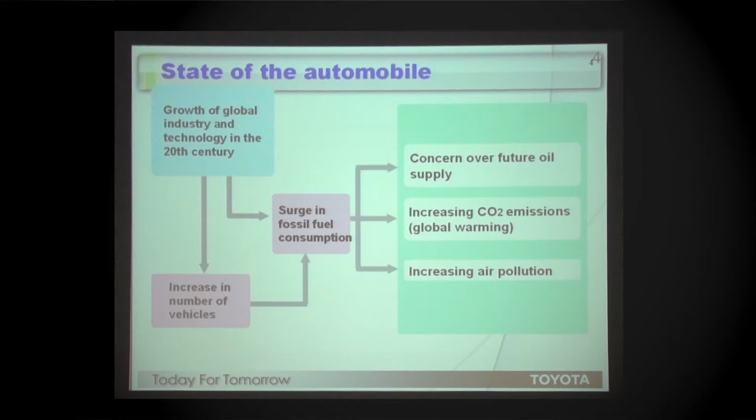But the car industry is still far behind. So I'm talking about the car industry a little bit. The state of the automobile relates to energy issues, because when the oil price goes up, what happens? People are forced to drive a car. If you are in Tokyo, maybe you can use a subway or public transport.

I'm living near Nagoya, only 10 to 20 kilometers away from the big city. Our family had 5 cars, not because I'm working for the car industry, but because our society outside the city is based on cars. When my mother wants to buy something, she has to go to the supermarket 5 or 10 kilometers away — no bus, no train. So the car is the only way to survive for us.

So when the oil price goes up, my salary goes to oil, and I have no money left for my hobbies. So that is the reality everywhere — in the United States, Japan. Japan and the United States are a bit lucky because our income or GDP is much bigger than just buying oil, but there are many countries that spend huge portions of their whole GDP to purchase oil.

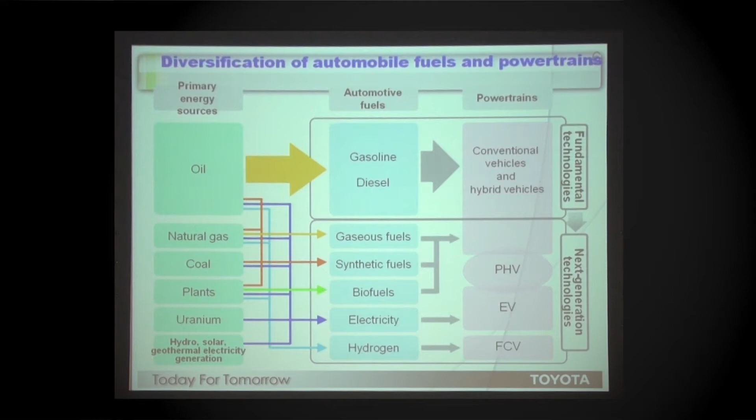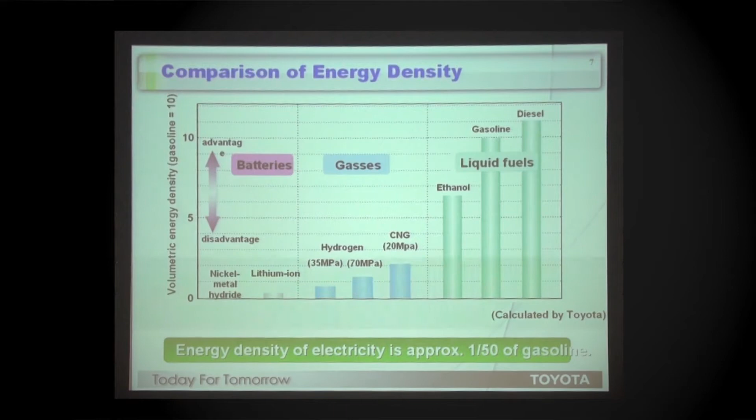But there's a big issue: the transportation of hydrogen is a big problem, and storing the energy on the car is also a big problem. Compared with gasoline or liquid fuel, hydrogen or battery has very small capacity to store. So this is a big problem.

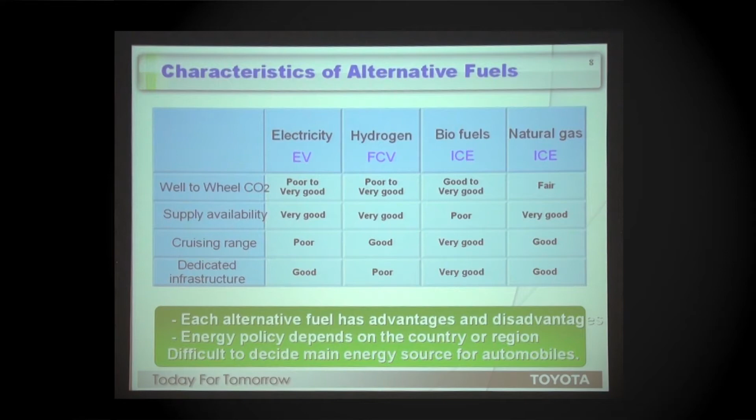This is a comparison of alternative fuels: EV, FCV, ICE. There's no perfect fuel. As Ambassador Roos said, we have no silver bullet. We need a portfolio to use the best option in the best place at the best timing.

And this is the hybrid. I was luckily involved in the Prius development 15 years ago. Actually, next Monday is the Prius's 15th birthday. So I remember the very hard days before that birthday.

Interestingly, 15 years ago I never expected further progress for the Prius. The Prius was a technical showcase — a very good combination of technology. But the reason I didn't expect more was that when we developed the Prius, oil price was only $12 a barrel.

Later, I proposed to our executives that the Prius, or hybrid technology, could flourish and become popularized when the oil price went above $40 per barrel. But my big boss said, don't joke — maybe twice that price is possible, even three times, but $40 per barrel is more than a joke, he said. But only 7 years later, the oil price was $145.

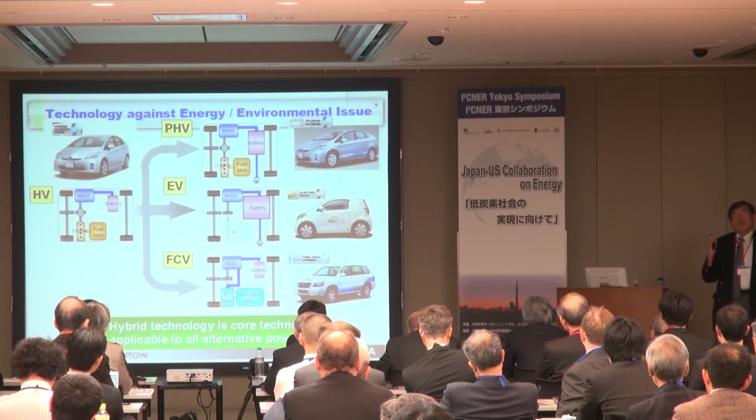I think those pressures develop new technology. When you put a bigger battery for the plug-in and replace the engine with the battery, that's an electric vehicle, or actually remove the engine.

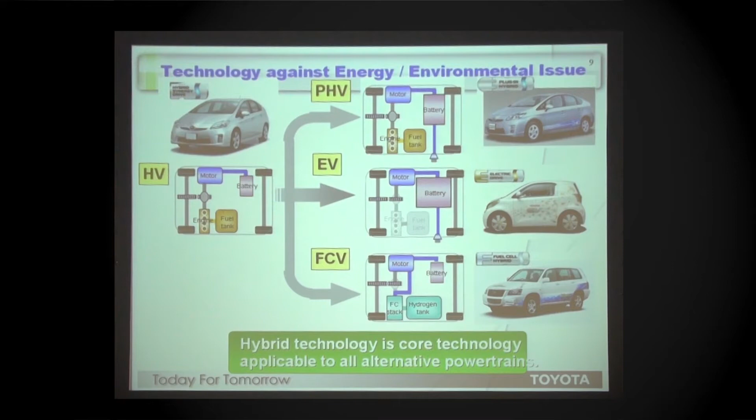But only the fuel cell has a very big coverage compared to the electric vehicle, plug-in, or internal combustion engines.

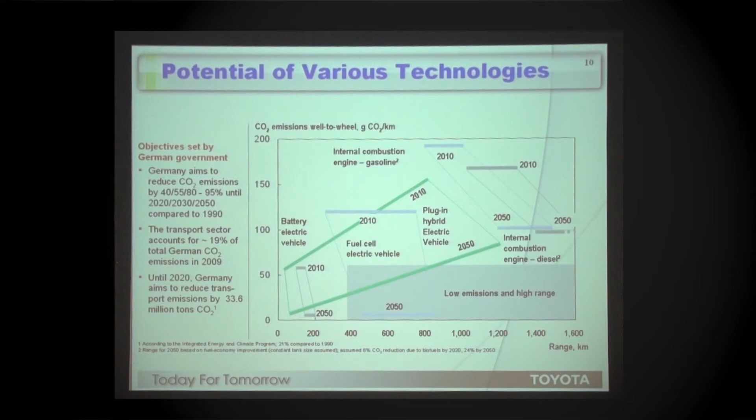I have been working with engine engineers. As long as oil is available, oil is a very good fuel, but it's very precious, so we need to keep it as a precious material. We need oil not just to burn, but to make your clothes or plastics. I think this is very important.

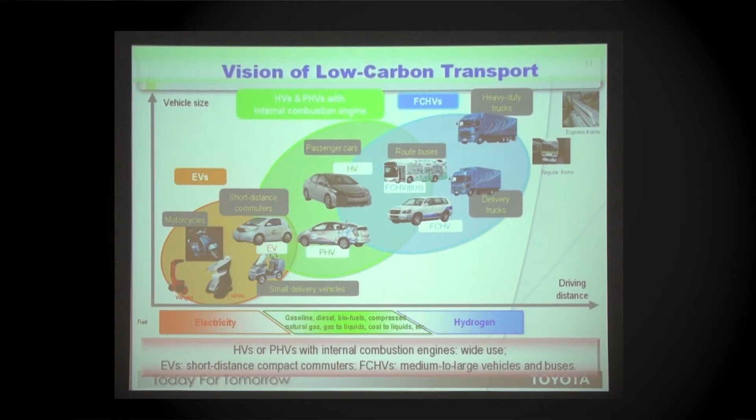So this is our portfolio for low carbon transport. As long as oil is available, plug-in and hybrid is very good. For small commuters, the electric vehicle, and middle to large vehicle with a fuel cell, and the larger, maybe the train or other alternatives. This is a comparison of efficiency.

From natural gas, this is the total efficiency - the efficiency to produce electricity or hydrogen. Then this is the efficiency of the vehicle itself. If you multiply the fuel efficiency and vehicle efficiency, this is well-to-wheel, and this is in direct connection to the carbon dioxide emission.

So electric vehicle is very good in vehicle efficiency, but when you produce electricity, you emit a lot of carbon dioxide, basically. Especially in Japan now, we do not have nuclear power at this moment, so probably efficiency is better, but you need to produce electricity, emitting more carbon dioxide.

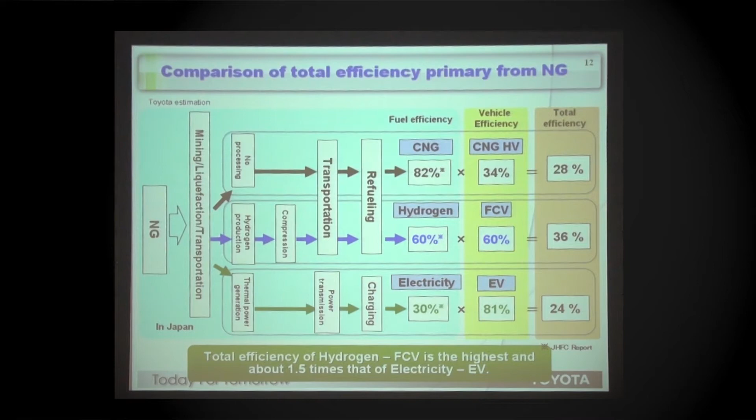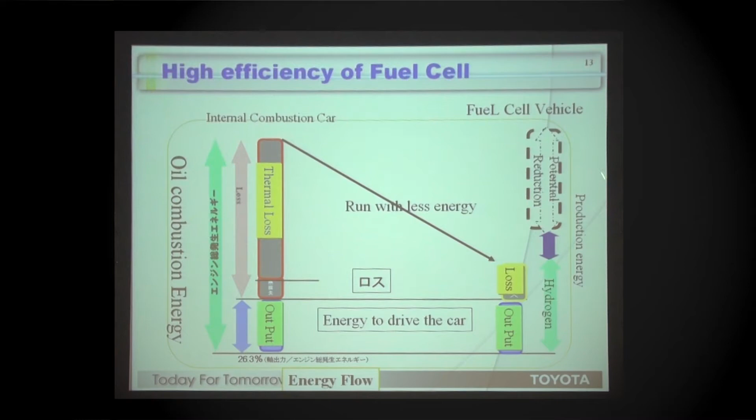Anyway, we need to optimize the use of natural gas, so hydrogen is a very big candidate. And why hydrogen is very good is also the fuel cell has very high efficiency, so even if you put some energy to produce hydrogen, you can still reduce primary energy drastically.

Another important thing for Japan or countries that import oil is this ratio of the import for the gasoline engine. So you have a big part of the money going outside Japan, and 56 yen for tax, and only a few yen for the refinery and gas station.

If the oil price goes up, the neighbor, the gas stand owner becomes rich - that's okay because they will buy our Toyota cars or Lexus. But the reality is not so. You spend a huge amount of money for your gas at the gas stand, and almost all of that money goes out from Japan.

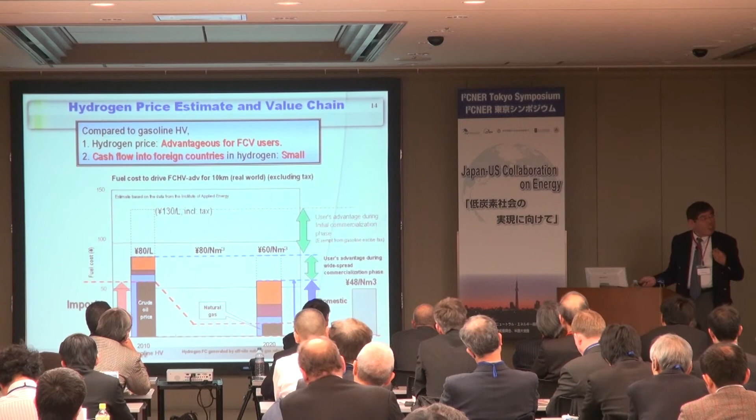For the case of hydrogen, this is a bit different because hydrogen can be produced from many low-cost or cheaper materials. Like previously, oil residuals such as asphalt were just burned, but they could be converted into hydrogen. And for the US, shale gas has big potential to produce hydrogen.

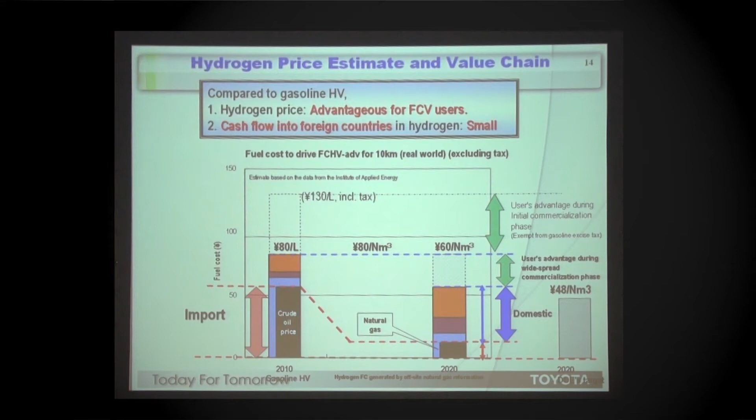A very important thing is many people ask me which is the future - electric vehicle or fuel cell vehicle. I think the battery electric vehicle is more expensive than the fuel cell in the near future, because you need a huge battery to drive 500 kilometers, which is what most people expect for cars.

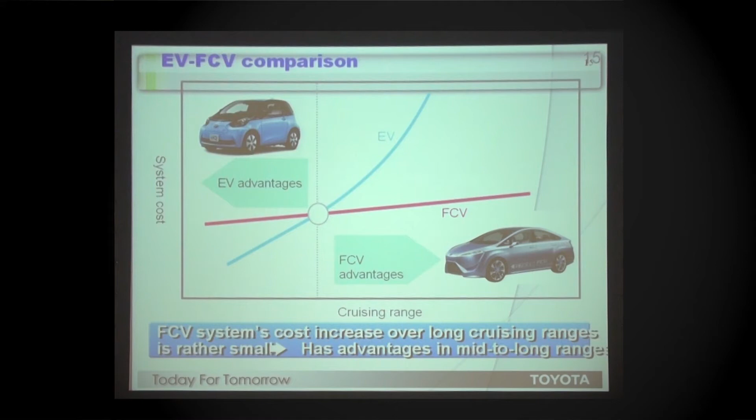I think the fuel cell has a bigger potential to replace the current normal use of cars. This is the advantage of fuel cell vehicles - zero emissions, performance, because when you drive the car it's quite silent, very vibrationless and noiseless, and also driving pleasure.

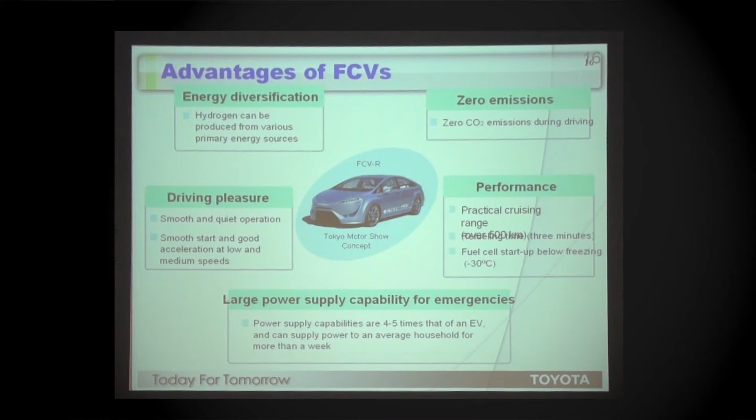A very important thing for industry is, of course, societal needs. Battery electric vehicle and fuel cell vehicle are almost equal - no emission at the road. Plug-in hybrid is very close, and hybrid is distant.

But cars are chosen by normal customers, normal consumers. They will choose the car because of convenience. And if you compare these technologies, the convenience is completely different. Of course, if you improve the network or infrastructure, you can improve it a bit, but it's not enough.

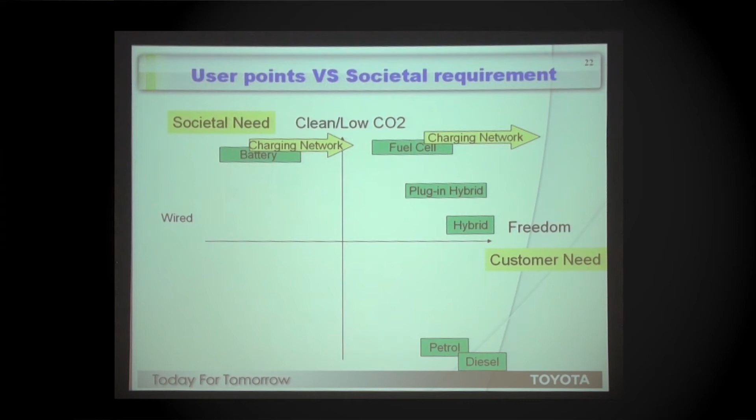That's why I asked Professor Sorensen - we need a methodology to implement societally good technology that may have some economic lack of benefit. How do we implement it? This is very important. And for society, it's very clear, because this is the case of the hybrid.

If you're driving a hybrid car, you probably reduce your expense for gas. If you drive 10,000 kilometers a year, maybe you can reduce $1,000 or so easily. And people think, if the price difference between the hybrid and regular cars is $3,000, you can get that back within 2 or 3 years' time.

But a car lasts more than you expect. The car stays in your society for 15 years. So if the car reduces oil consumption by $1,000 a year, and it stays 15 years, that means $15,000 total. But when you purchase your car, you don't think about that 15 year timeframe. You only think about 3 or 4 years.

This is the gap between the societal benefits and what I'd call the environmental or personal benefits. We need to solve this.

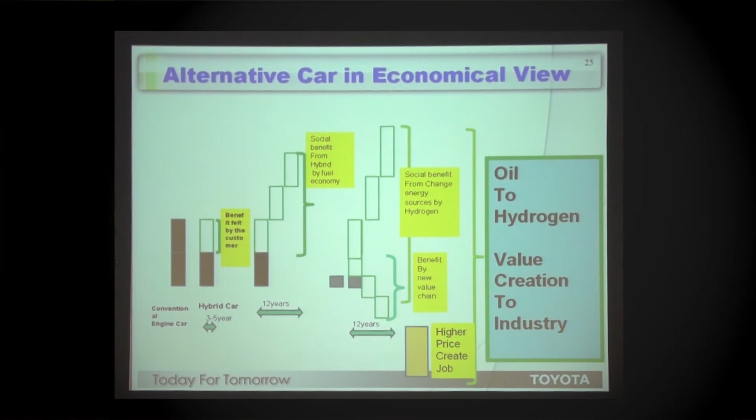And hydrogen has more advantage than the hybrid, that I would like to say. But the absolute value is very simple.

Sorry, this is a bit old. Until 2004, Japan imported oil worth less than $50 billion a year - 5兆円. Now, as of 2008, that is $160 billion.

Current value is almost $200 billion a year, 16兆円 for Japan. This increase in money - who paid for this? You, not industry. Every year more than $100 billion, 10兆円, is consumed, increased to purchase oil or energy.

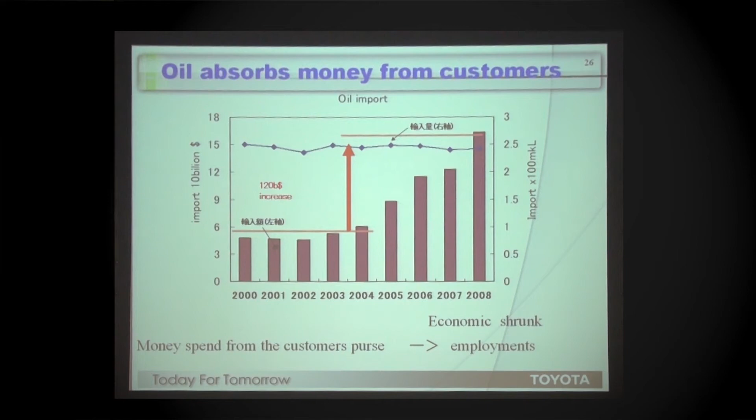This is very significant - if you reduce consumption by 10%, that's equivalent to $10 billion. So this is the benefit of converting your car to an electric vehicle or a fuel cell vehicle.

By the way, where is the fuel cell car? That is very important, so the industry is very serious. Toyota officially announced that we will launch a sedan fuel cell vehicle in 2015.

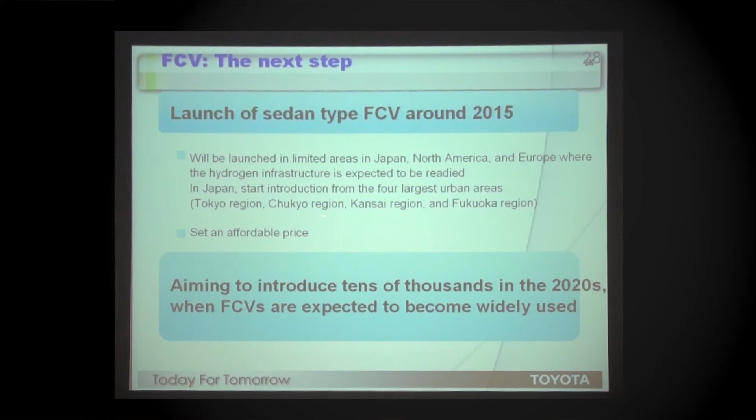And we are aiming to introduce tens of thousands in the 2020s. This is the official announcement from Toyota, made by our executive vice president about 2 months ago. We will bring the car to Japan, North America, and Europe, where hydrogen infrastructure is expected to be ready. In Japan, we will bring it to Tokyo, Nagoya, Kansai, and the Fukuoka region.

This is some progress on our fuel cell cars. The fuel cell has reached the highest level of 3 kilowatts per liter. This is very impressive even for me, because this size of fuel cell generates 100 kilowatts. Also important is that this must be affordable.

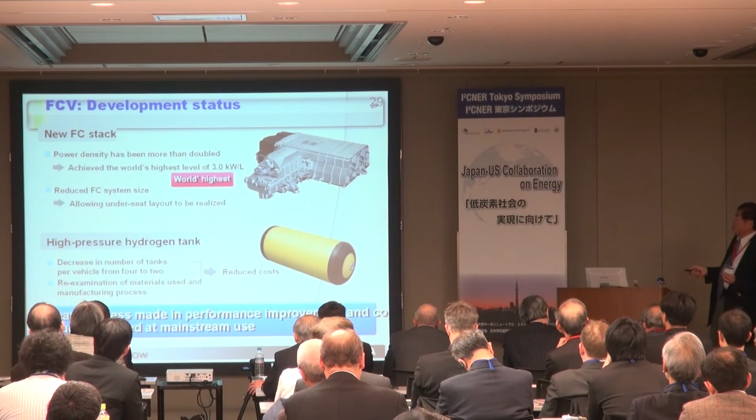Previously those fuel cells cost millions of dollars, so now we are working very hard to reduce the cost. And we're also working on the hydrogen tank.

We also announced that we will bring not only fuel cell cars but fuel cell buses. And we are working together with Toyota Industries Corporation, 豊田自動織機, on a forklift.

By the way, fuel cell forklifts are already flourishing in the United States. Nissan is producing electric vehicles using fuel cell forklifts. And BMW is working inside their factory - fuel cells are being used to carry parts.

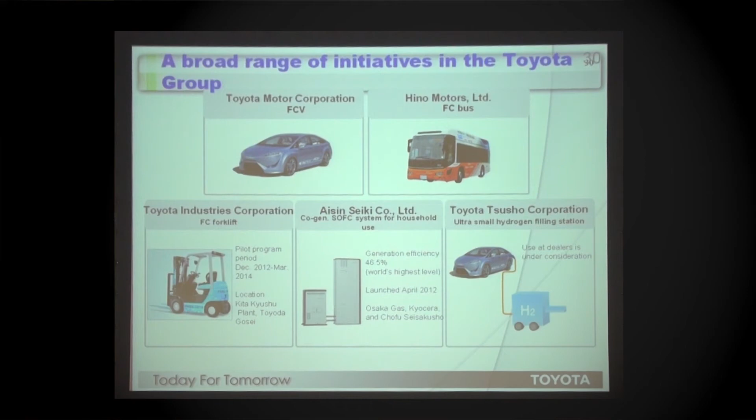Then there's also stationary applications. We are working to generate electricity from our fuel cell car to power a house or similar. This is a new concept. Because after the last disaster, we need emergency electricity, and the fuel cell car has big potential to provide that.

And this is a bus. Already buses have been implemented for Chubu Airport, and routes like Tokyo City and Shinjuku to Haneda. I think you can try the Shinjuku Haneda route now.

Then infrastructure - this is a very important part. This is the FCCJ announcement from a few years ago, that the energy providers will build infrastructure much prior to car accumulation.

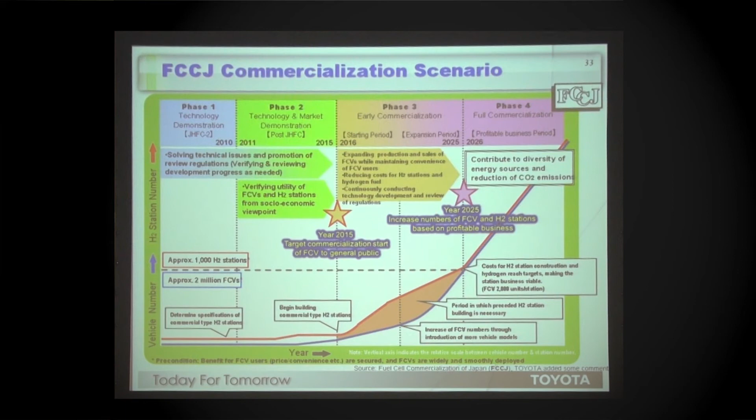Many people talk about the chicken and egg problem. But without the infrastructure, nobody buys a fuel cell car. So this is very simple.

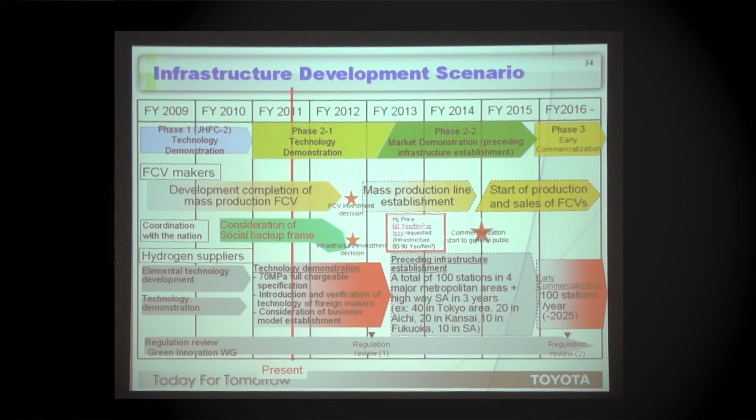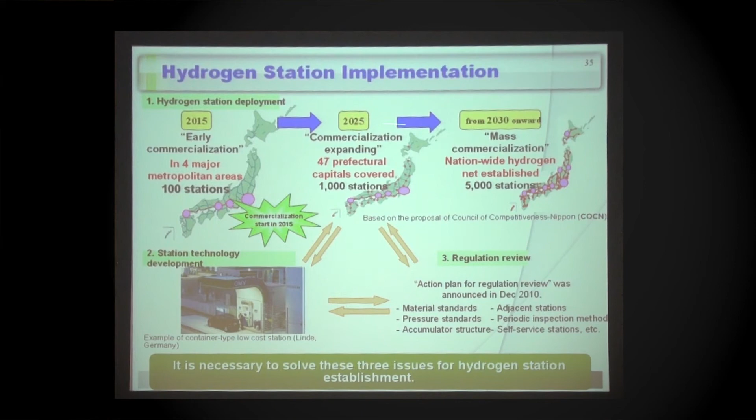Fuel cell manufacturers are working to prepare for 2015 implementation and mass production. We are now very close to the point of no return. The energy companies are also working to prepare the infrastructure, together with the government, and governments are working to deregulate regulations. So in 2015, starting with 100 stations and expanding gradually to cover the whole of Japan.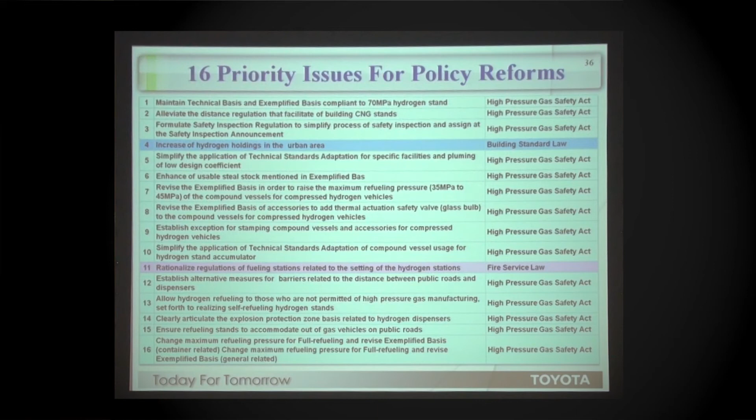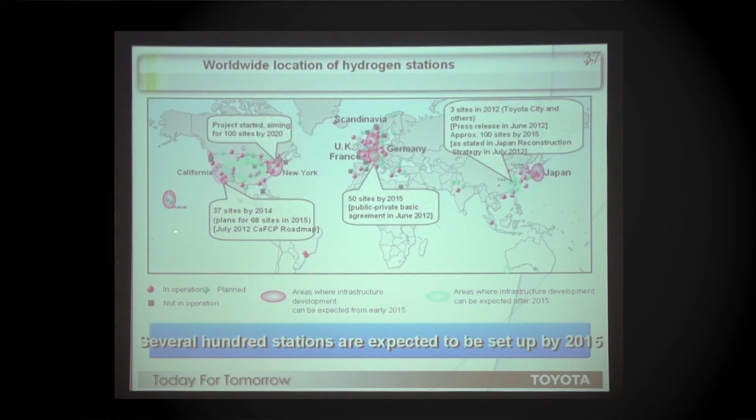This is the worldwide location of hydrogen stations - Japan and Korea, with Korea working very hard, and Germany, UK, France, Scandinavia, and the US - California and New York, among those places. Already there are 100 stations planned for Japan, 50 stations for Germany, and 37 for early 2014 in California, with more in 2015.

And in the UK, they are now working together with the government, the energy company, and the industrial company. These are government departments seriously working together with the OEMs and even electric companies. So electric companies are very much interested in hydrogen now, worldwide.

Hundreds of cars are already on the roads, and they are accumulating a lot of mileage every day.

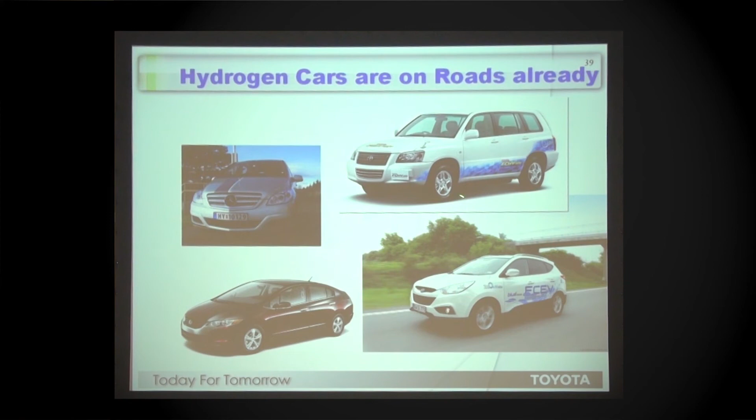So Toyota, Hyundai, Honda, and Daimler. I have been working for the car industry for years. This is my personal vision.

The evolution of the vehicle system started with coal-burning cars, even steam locomotives, with manual transmission. Then it converted into oil-burning engines, internal combustion, and automatic transmission, which now flourish in Japan and the US. Then came electric drive. And by this movement, efficiency goes up. But why was this evolution made?

It's quite similar to life, because the evolution of life is always made by some restraint, because you are forced to run. Unless you run quickly, you can be killed, or become energy for somebody. So coal burning or steam engines were killed because of range, because people wanted more range. And automatic transmission was made for comfort.

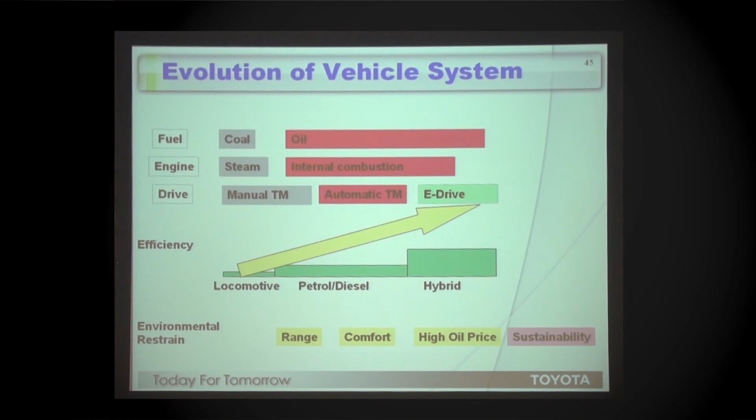And electric drive, as I said, when I introduced the hybrid, we never imagined hybrid would now be around 30% of our car sales in Japan, because of the high oil price. This is the restraint. But what is the next environmental restraint? It's sustainability, because we need sustainable fuel for sustainability. Then the evolution was made.

I think hydrogen is kind of that. But when we see the colors already, most of the energy is very advanced compared to cars.

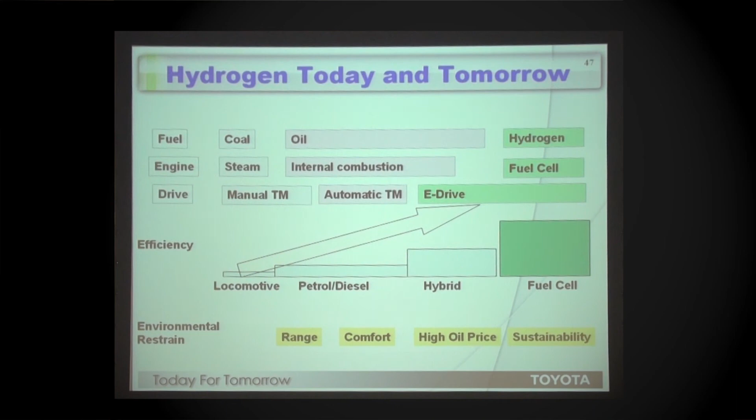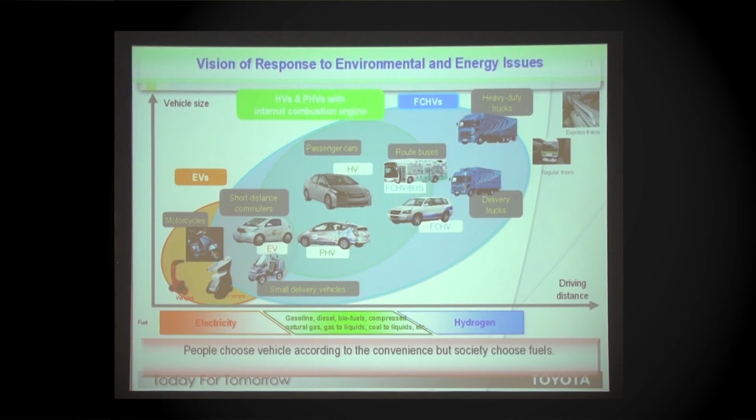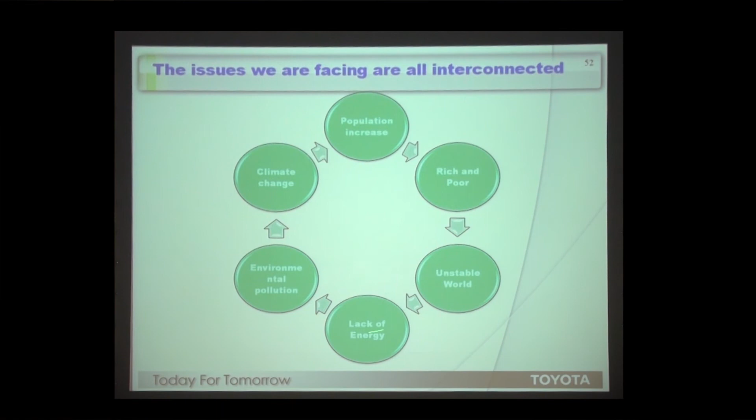So this is a portfolio of Toyota, but from my vision, this is a portfolio of myself. Fuel cell covers everything. That is a solution to the issue we are facing, and everything is interconnected. So north and south, rich and poor, everything, because this is the energy issue, the fuel issue. We need to cut all the relations to solve all the problems.

Recently, an interesting one is in Germany, because they already have 50% or 30% total wind power, and they are trying to store the energy. They electrolyze water to produce hydrogen, then mix it with biogas in a normal combustion generator and convert it back to electricity. This hydrogen can also be used as fuel. So this is a big trend now worldwide.

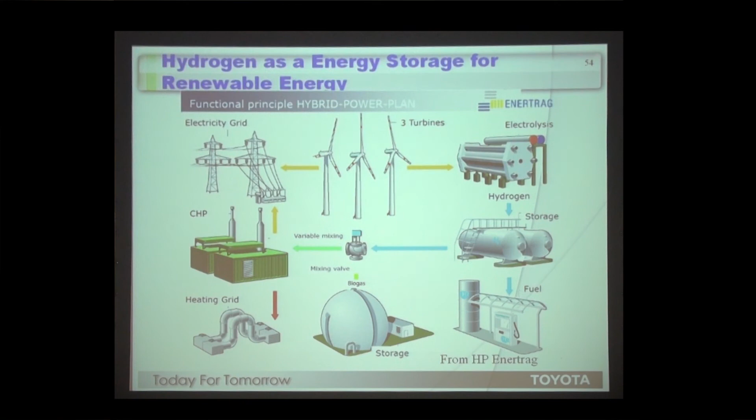Recently, I've been working with the concept of a HyGrid, combining the electric grid, hydrogen, and fossil fuels. Most people working on electricity only work with a viewpoint of electricity, trying to store energy with a battery. But actually we can convert the energy into another material, like hydrogen. Then hydrogen can be used to go back to electricity, to be stored for a while, for trading, or as fuel for a car. So you can widen the choice.

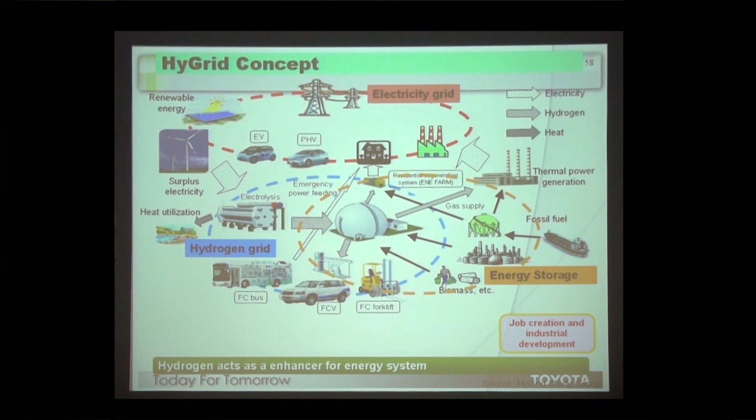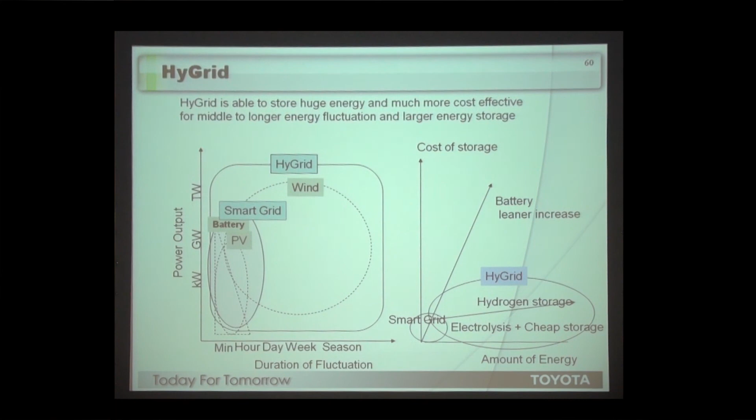I think technology and new ideas will bring a new society. And luckily I found this book — do you know this? Gas Light and Coke Company. Many people ask me when the hydrogen economy will come or be realized. This company, Gas Light and Coke Company, was built in 1813, 200 years ago. What did this company make? Hydrogen — because this company provided gas for gas lighting in London, Paris, Tokyo. These were so-called coal-induced gas: coal is partially burned, and water is injected into the burning process. Then hydrogen is split from oxygen, producing hydrogen plus carbon monoxide. This is the gas that lit the world in the 19th century. So the world was a hydrogen society before electricity.

I have been fortunate to be involved in the development of the Prius, and what I've learned is that the future is not predictable, but we can prepare for it. As the world is changing now, we are fortunately positioned to observe. But observation isn't so interesting — participation and contribution are more exciting. So I think our I2CNER audience has great potential to contribute to changing the world for the better. Thank you in advance.